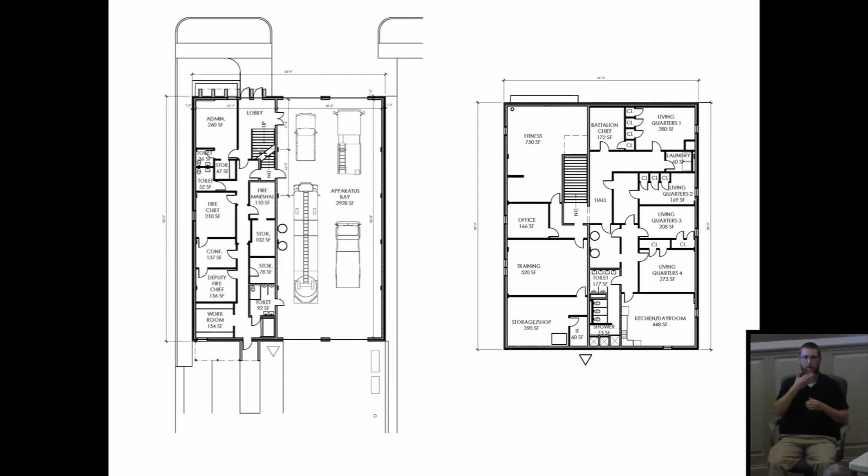So again, that led to site planning, and there were several sites in the area in Danville that were considered, but we decided to focus in downtown Danville for a couple good reasons. Here's where we are today. There's the existing fire station, and we decided to move across the street next to this building.

And again, we did like this location. Its proximity to City Hall and the police department provides a certain civic importance, logistics, and its location on Main Street, I think, provides a community connection, which I thought was very important. So to zoom in on the site, we looked at different arrangements of the pieces on the site.

It's a challenging site in many ways, but we think it's workable. So this is the arrangement we landed on that we liked the best.

You'll see that the apparatus bay where the trucks are is off to the left there, the red block. Then the living spaces and administration wing on the right next to City Hall. What this did was it formed a courtyard in between the two buildings, which would be landscaped.

The dormitories and the administrative offices would view onto this courtyard. It also created the opportunity for a plaza out in front here, which we're calling the First Responders Memorial Plaza.

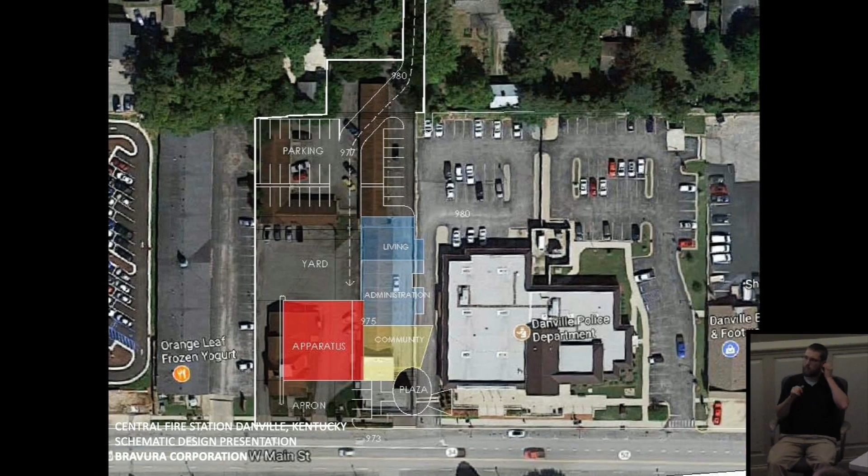It's linked directly to the City Hall Plaza up here and connects via some steps that would link the two plazas together, instead of just ending the way it does right now on the east side.

So that site plan became this fully developed site plan. It's a little over an acre in total area. We get about 20 spaces for fire department staff. In the rear of the site, there's room enough for a storage maintenance building, plus a generator, plus the new antenna.

Here's the large apron off of Main Street, where the trucks are, in this apparatus bay here. The service yard is in the back. And here's this landscaped courtyard I was mentioning, and finally the plaza out in front off of Main Street.

So moving on to the floor plans, a more detailed look at the spaces.

Again, we had numerous meetings with fire department staff, and the trend right now, and Ken will back me up on this, is that you try to establish a hot and cold side to your station. Because of the hazardous materials that come back on the trucks and in the gear, you try to make a clear demarcation between the hot areas here, where your trucks and gear are stored, and the living spaces and administration on this side.

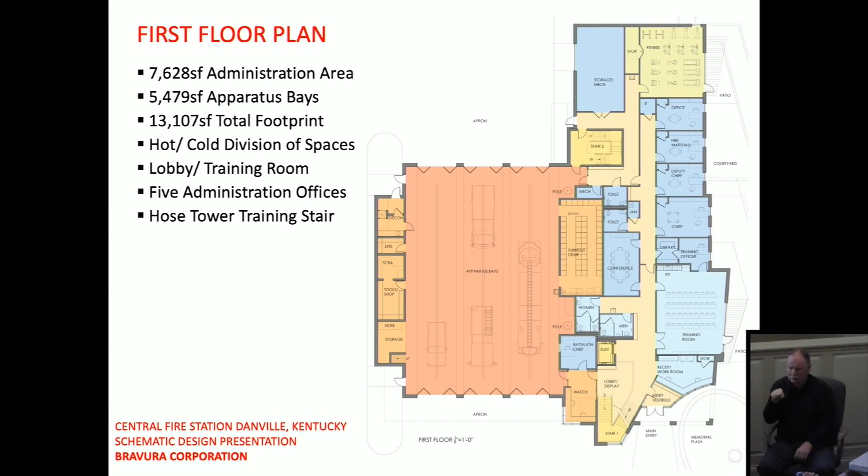Second floor, above the administration offices, is the living quarters for fire crews. We've got 10 private dormitories, very generous. Their living spaces up here include the day room, kitchen, dining, and they get their own outdoor deck too.

2 fire poles lead you down into the apparatus bay, and then there's a service mezzanine here where they can also do some indoor training.

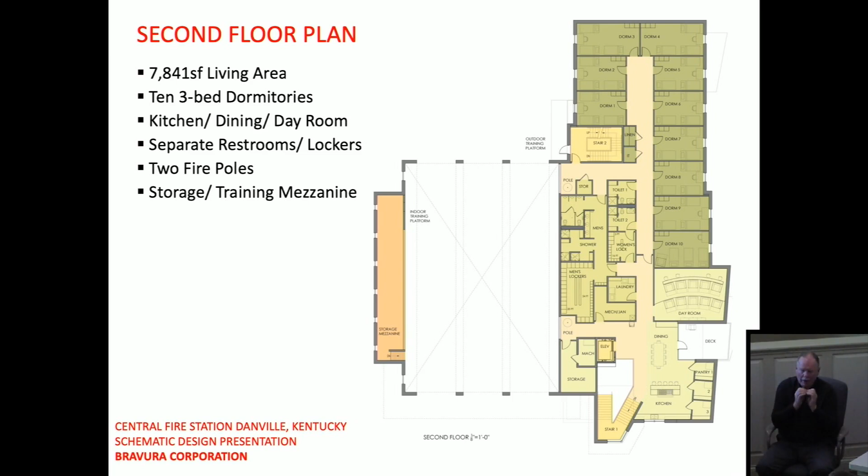Now, through a basement plan, as we developed the floor plans, we saw the potential for basement space, and ultimately linking the basement of the police headquarters over here via a tunnel into the fire station, which you can see the advantages of.

Ultimately, the basement space could be another training room, perhaps even someday a joint operations center. So we're looking into that option now.

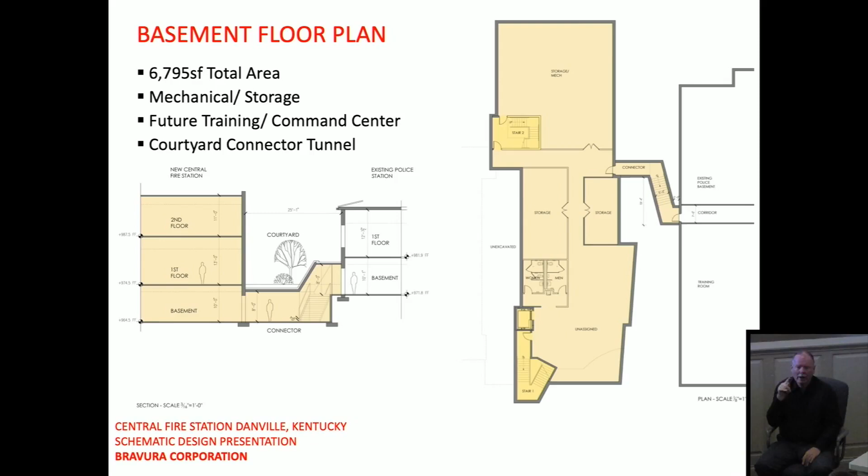So I'll move into the building elevations. Like any architect, we look for inspiration from both new stations and traditional stations. Some of the elements that say fire station to us are the brick, the towers, the doors.

We also looked around downtown Danville for inspiration, some of the landmarks here, buildings along Main Street, again the brick colors, the cornice lines, that kind of thing. So I'll quickly run through these elevations. This is the front south elevation.

It's a fairly compact design, as I pointed out, because we didn't want to overwhelm City Hall over here. This is the main apparatus bay with a big signature arch over top of the 3 truck bays. It's glazed, so it allows a lot of natural light into the truck area, which you enjoy.

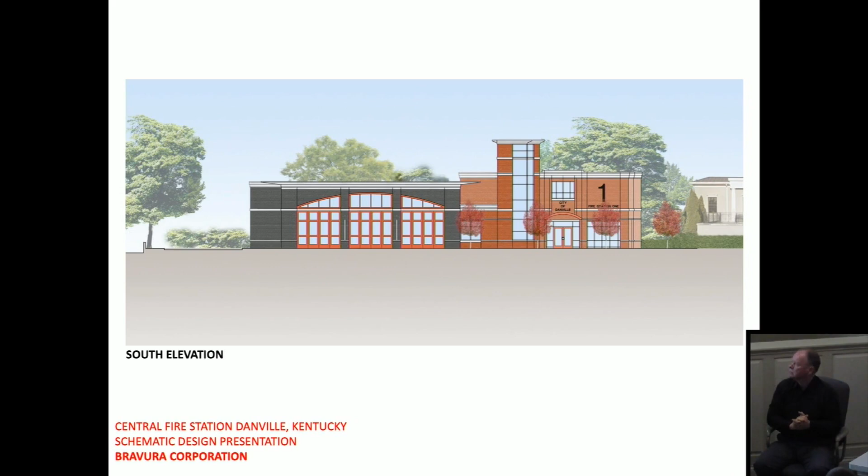The archway is balanced by a tower on the lobby of the building, which is also the main stairway that leads you up to the 2nd floor. The entry doors are recessed back in to create a little porch in front of the entrance doors. The rear elevation shows just the 3 bays leading out into the service yard.

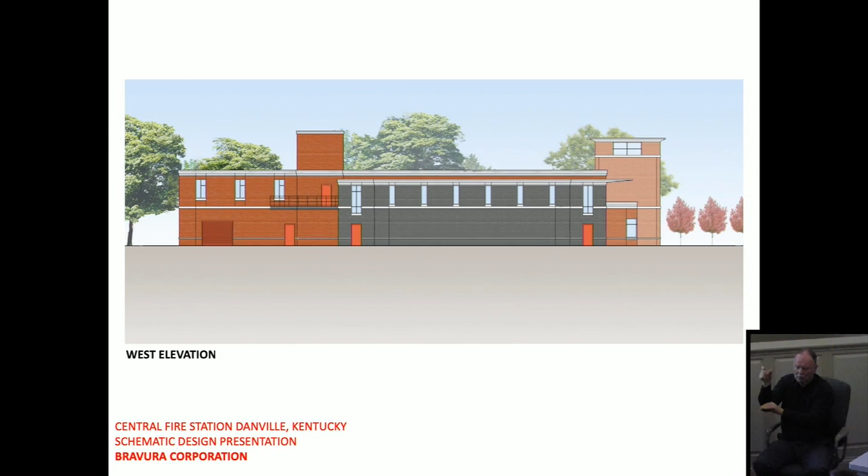This will be the west elevation facing the Orange Leaf Center, showing some tall glass above the apparatus bay to give natural light. And then finally, the east elevation, which would face City Hall, showing the administrative office windows on the ground floor.

Here's the deck off of the dining room, and the patio off of the conference/training center. We like the composition of masses, of brick colors, and differentiating different forms and uses of the building. It will include traditional brick details, traditional stone details for cornices, bands, and other decorative elements.

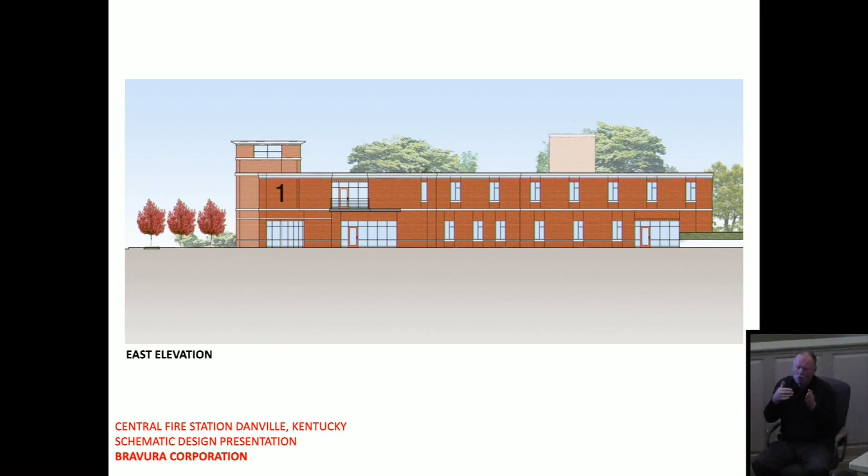Moving to the rendering, here's the exterior rendering, what we think the building will look like. If you were standing across Main Street looking back towards City Hall, you'd see the apparatus bays on the left and the main entrance, public entrance, and stair tower on your right. You'll also see the plaza there, the First Responders Memorial Plaza, which, with the addition of the piece from the World Trade Center that Danville just acquired, we think will be the centerpiece of that new plaza.

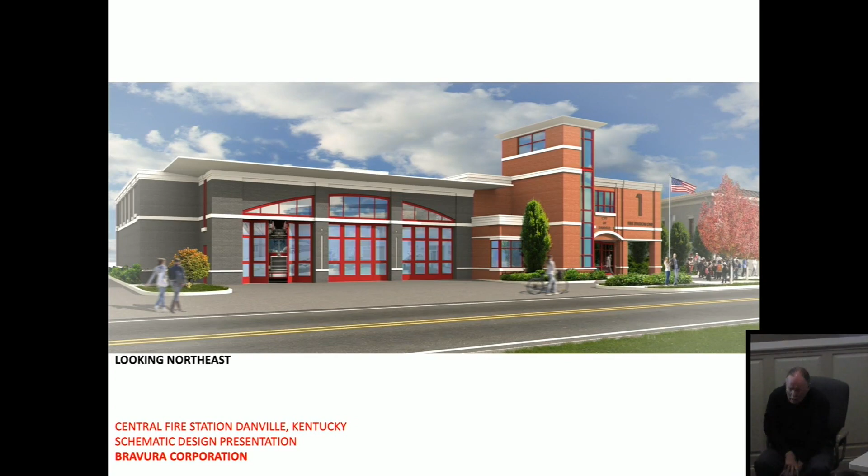Moving forward, the demolition of the existing buildings on the site next door will begin shortly. We'll need to do some soils testing in that area before we can get into structural design. We're wrapping up the preliminary construction cost estimate, and then we'll move into technical details, specifications, and structural and mechanical design. At this point, we figure we'll have drawings ready for bid within 90 to 120 days. That concludes my presentation tonight.

Thank you, sir. Can I ask a quick question? Absolutely.

I noticed the new fire station will pretty much almost adjoin City Hall, and right now there's a driveway between the two. What's going to happen there? Let me flip back to the site plan. What we decided to do was create a campus between the two buildings and eliminate that existing drive, turning it into a green space rather than a paved drive, about the same width as it is now. The entrance drive would be on the west side, jointly used by the police as well as fire trucks coming in and out. There is also an access to the north onto Broadway through that existing alleyway.

Thank you. Similar question - we're coming in off Main Street, and it's just a schematic at this point, but are your trucks turning in the back and coming through? That's right. One of the priorities was to have a pass-through fire station rather than just a single side, because right now the building's too small to really negotiate the large trucks. That was originally the idea, to have doorways on both sides of the building so you don't have to back in off Main Street all the time.

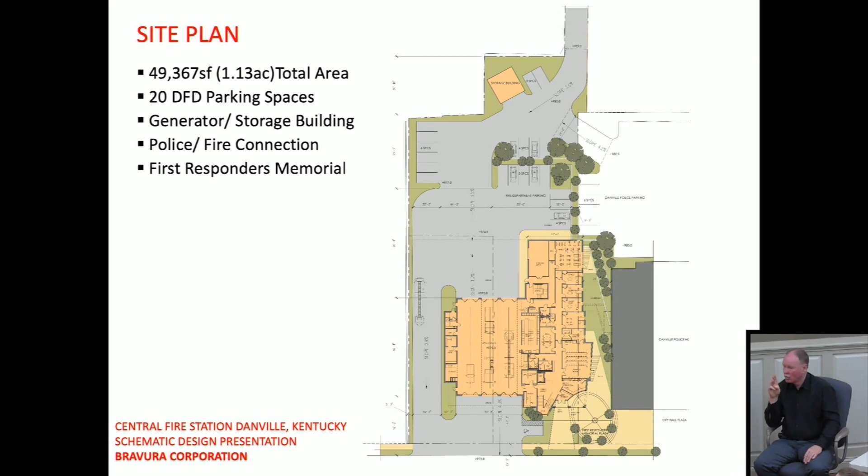We've done a lot of studies and determined that we do have adequate turning radius to get the largest ladder truck into that last bay. Smaller trucks won't have an issue, and could also come in from Broadway if needed and go straight down into that bay. So there's enough maneuvering room in that back service yard to get the trucks in and out.

Will that entrance off Broadway be secured? Yes, Mayor. We talked about that a little bit ago - there would be a secure gate right at the end of the property.

Any other questions, thoughts? Where's Ken? Ken, talk to us. What do you like about it? What don't you like about it?

Well, we worked really hard and long with Dave on this project, from our first contact asking how do you want it programmed, what do you see for the department. I was given a goal of a 50-year station with 20 years no touch. That was my first goal, which is why you see a building like this, so we don't have to worry about it like we do next door. From that point forward, we've had numerous meetings and visits to other fire stations, getting a feel for what we need here and what would look appropriate in town.